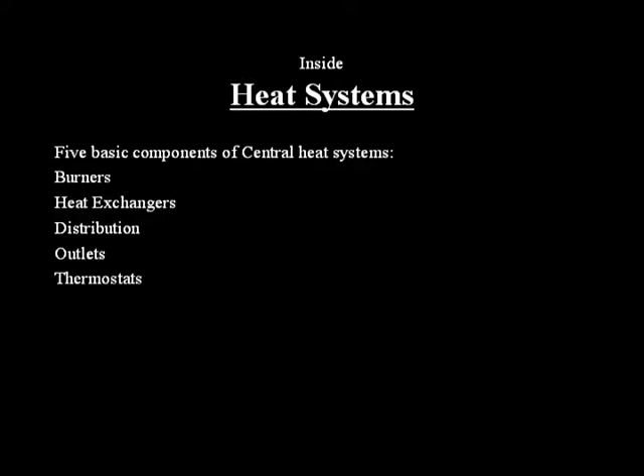There are 5 basic components of central heat systems: burners, heat exchangers, distribution, outlets, and thermostats. A burner converts gas or oil to heat at temperatures reaching 800 degrees, or a resistance coil converts electrical energy to heat. At the heart of the furnace is a heat exchanger that transfers this heat from the flame to air or water. The toxic fumes produced here rise up and exit through the flue.

One of the worst problems your heater can have is a cracked heat exchanger. When this occurs, toxic fumes that should be headed upward instead begin to seep into ducts and circulate through the house. If you ever smell fumes, shut off the heater and leave your house immediately. This is a rare event and usually happens in furnaces older than 20 years of age. Yet it's a good idea to have your furnace serviced once a year. The professionals will check out your heat exchanger for signs of trouble.

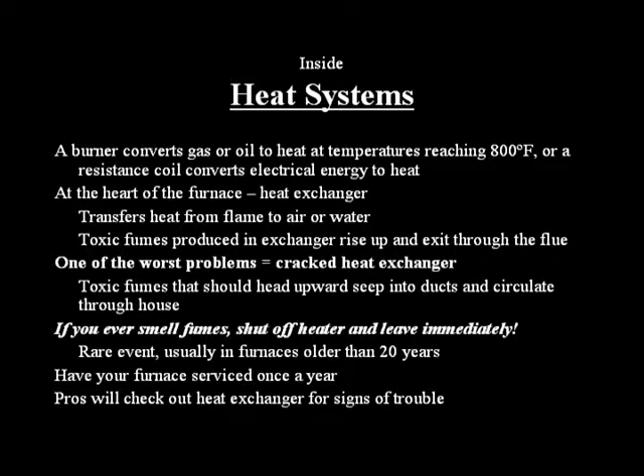There must also be a distribution system, such as pipes or ducts, to circulate air, water, or steam around the house. Heat is then transferred to the rooms by vents or radiators. Larger houses are more difficult to heat because the registers or radiators farthest from the furnace or boiler don't receive as much heat as closer outlets. To minimize this problem, warm air systems have dampers, hot water systems have throttling valves, and steam systems have air valves.

The most effective location of a register or radiator is along an exterior wall near windows or doors. Here, heated air will mix with cold air that infiltrates the house through window or door joints. To get more heat into the farther rooms, reduce the flow of heat in registers closest to the furnace. Look for return grilles on opposite walls of supply registers, or if there is a central return grille for the entire floor, it should be on the wall farthest from the door that leads to the floor.

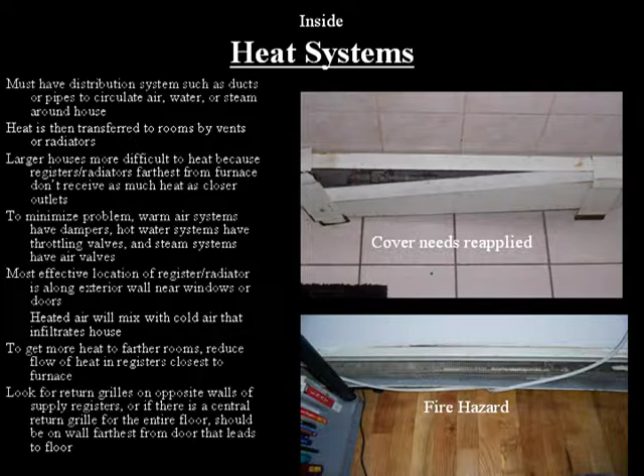And last, there must also be a thermostat with a master shutoff switch somewhere near the furnace. When the temperature drops below the thermostat setting, electrical contact points close and activate the system. When the set temperature is reached, the electrical contacts open and shut down the system.

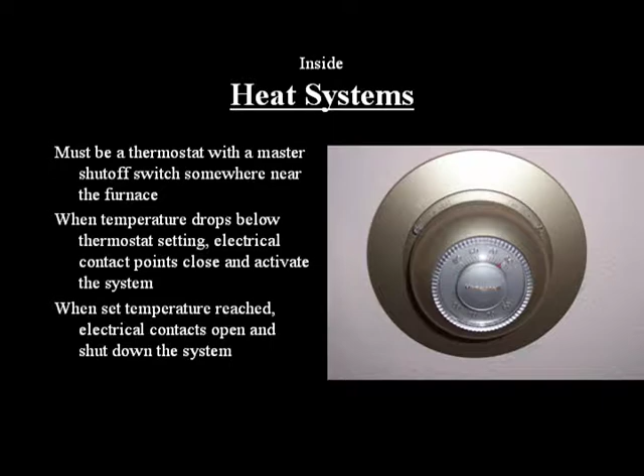Ideally, you want your home's humidity to be between 30 and 40% during the winter. Power spray humidifiers, as shown in the picture, are a great solution if you don't already have some humidifiers in rooms. Power spray humidifiers have a humidity sensing device and can be programmed with the touch of a button.

Warm air systems are also popular because of their ability to adapt to central air conditioners, and there are no pipes that can freeze or burst. The biggest advantage of warm air systems is price. Installing a new furnace is only a third of the price of a hot water or steam boiler.

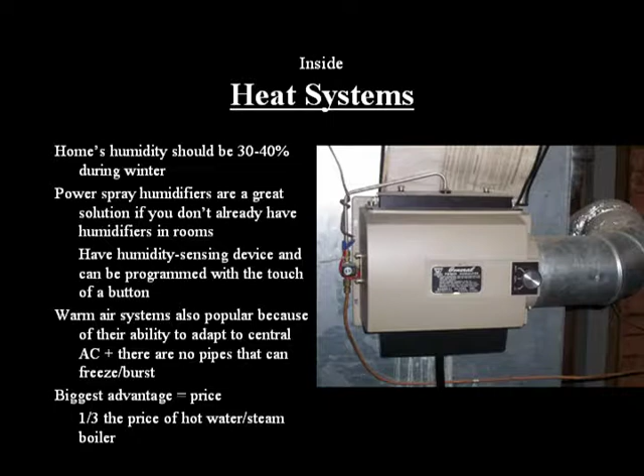Older homes may have gravity warm air systems. The large furnace looks like an octopus with many ducts coming out of it. There are no moving parts or motors, so this system works on the principle that warm air displaces cold air, thus causing air circulation. This system is considered obsolete, but if your house still has this system, it can be updated by installing a fan and motor assembly called a blower unit.

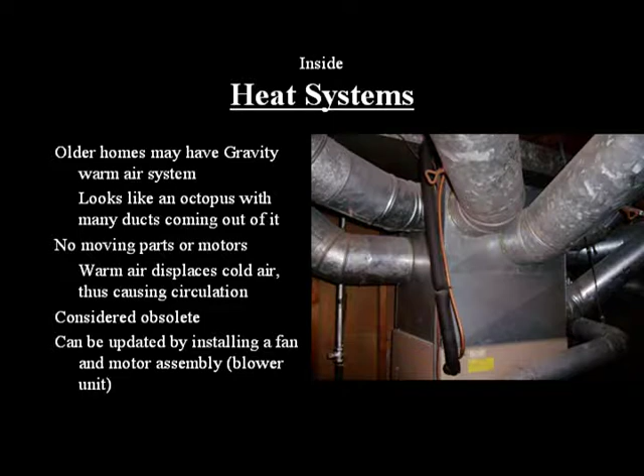A heat pump is a unique device. It can transfer heat from the outside to the inside for heating purposes, but can also do the reverse for cooling purposes. Of course, when the air outside gets very cold, the efficiency declines, which is why there are electric furnace coils incorporated into the system as an emergency backup.

In heat mode, the outdoor unit pulls air across coils. Heat is then extracted from the air and transferred to a refrigerant, which is normally a gas, at atmospheric temperature and pressure. A compressor compresses the refrigerant to extract the heat and sends it to the indoor unit. This fluid travels to the indoor unit and a blower sends air to be heated across more coils.

Outside, the unit should not be in a location where water can freeze to the blades of the grill. In other words, it shouldn't be under a leaky gutter. No bushes should be within 1 foot of the air intake on the side of the unit, and no tree branches should be hanging within 5 feet of the top where debris can settle. The unit should also be mounted on a concrete slab at least 6 inches off of the ground.

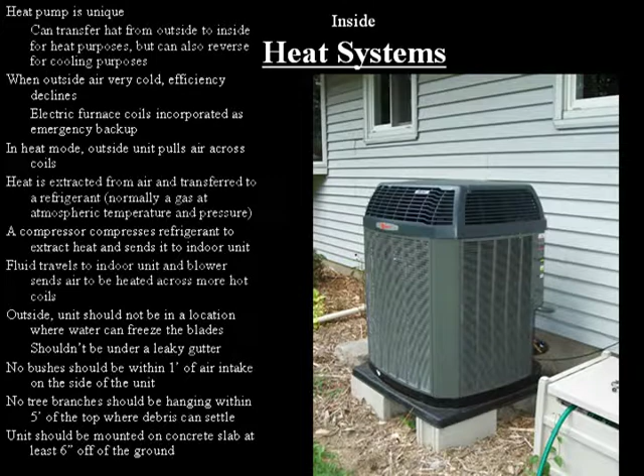Some homes are equipped with condensing furnaces. These were developed in the 1970s during the fuel crisis. Their high efficiency is the result of a second heat exchanger that extracts more heat from the exhaust gases that flow up the chimney from conventional furnaces. The temperature of the exhaust gases eventually reaches a point where the water vapor in the gas condenses and releases heat.

A pulsed combustion furnace is another high-efficiency furnace. Heat is also extracted from exhaust gases like the condensing furnace. However, heat in a condensing furnace results from continuous burning of fuel, whereas a pulsed combustion furnace gets its heat from 60 to 70 tiny explosions per second of a gas and air mixture.

Hot water systems work on the principle that water heated in a boiler can be distributed through pipes to radiators located throughout the house. When water is heated, it expands and increases its overall volume. To compensate for the extra volume, an expansion tank is needed and is often located in the attic. Without this tank, pressure would build up in the system and rupture pipes and fittings.

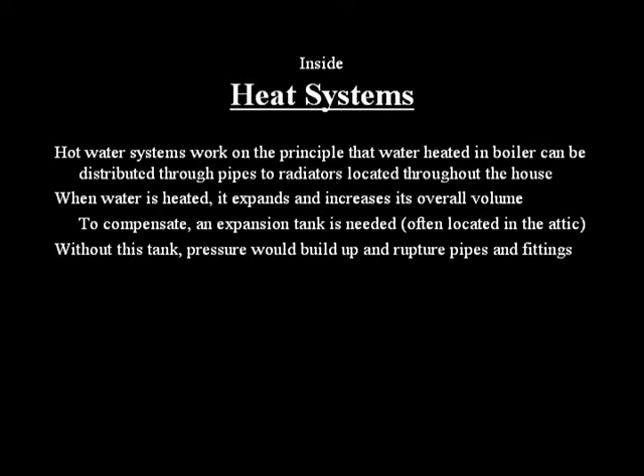The boiler water supply is taken from the house inlet supply. Your home supply of water has a pressure normally between 30 and 60 pounds per square inch. Water that is distributed through the heat system requires a lower pressure, usually 12 to 22 pounds per square inch. Therefore, a pressure-reducing valve is installed somewhere before the water enters the boiler.

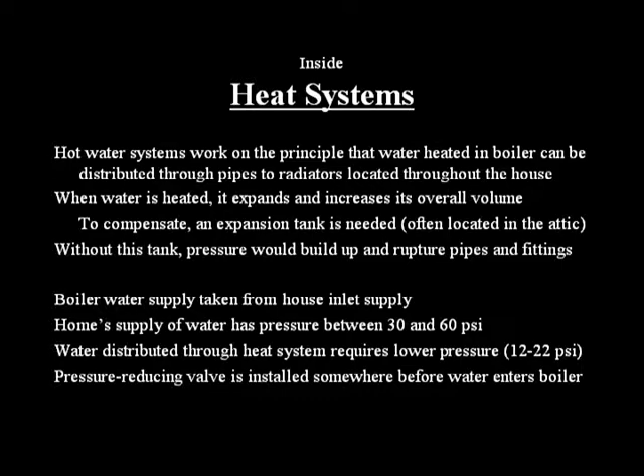Boilers are made of cast iron or steel, cast iron being less resistant to corrosion over time. The lifespan of most boilers is anywhere between 20 and 30 years. The only time a boiler needs to be replaced is when leaks occur that can't be patched or fixed. Don't forget that condensation may form and mislead you.

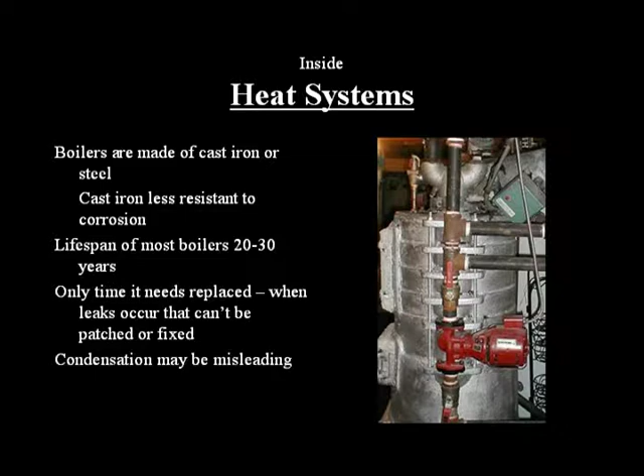Gravity hot water systems, as with warm air, are now considered obsolete and inefficient. The same principles of hot and cold apply. As water is heated, it becomes lighter and displaces cold water back to the boiler for heating. The distribution piping is about 2 more inches in diameter than forced system piping.

Gravity systems are classified as either open or closed. In an open system, the expansion tank has an overflow pipe extending to the atmosphere. Closed systems are not open to the atmosphere and have the ability to operate at higher temperatures. If you own a house with a gravity hot water system, or are interested in buying a house with this outdated system, the good news is it can be converted to a forced hot water system by installing a centrifugal pump and new controls.

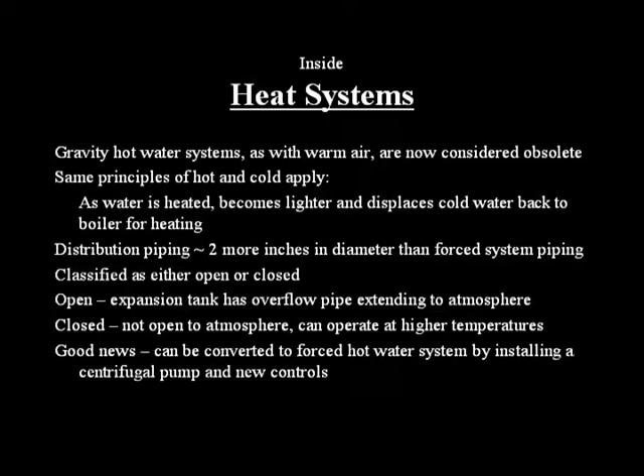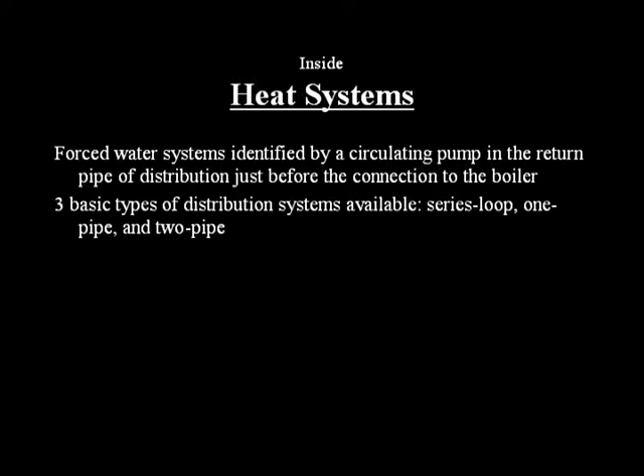Forced water systems are identified by a circulating pump in the return pipe of distribution just before the connection to the boiler. There are 3 basic types of distribution systems available: series loop, 1-pipe, and 2-pipe. Series loop is the simplest and easiest to install. This is usually found in smaller homes where individual room adjustments are not needed to balance heat distribution. Baseboard convectors are present, and when the system is shut off, all water flow stops. Larger houses may be divided into 2 or more zones.

A 1-pipe system is exactly that. 1 pipe serves as the supply and return. Radiators are attached to the supply pipe by 2 risers, 1 on each end. The radiators also have a shutoff valve located on the inlet riser, so room-by-room control is possible. 2-pipe systems have 1 supply pipe, 1 return pipe. Cool water leaving the radiator doesn't mix with the hot water from the supply main.

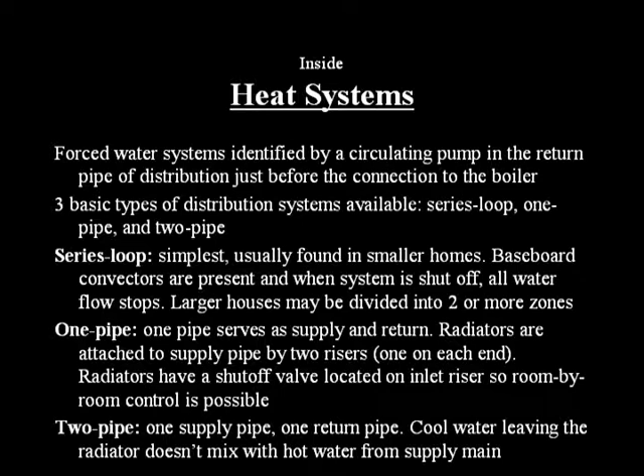Condensing boilers, as with condensing furnaces, increase the efficiency of the system by extracting more heat from exhaust gases with the heat exchanger and transferring the heat to water. Again, the water vapor in the gas condenses, giving up heat.

Neither condensing furnaces nor boilers require chimneys for venting exhaust gases. Instead, a plastic pipe can be used to vent the gases through a sidewall. Both versions of this system require an intake air duct if outside air is being used for combustion. Both will have a power vent called an induced draft blower and condensation drain lines.

Pulse boilers are also available to increase efficiency. Again, heat is generated as a result of 60 to 70 tiny gas explosions per second. The big drawback of the system is the noise it generates.

Steam systems are very similar to hot water systems. They are no longer installed in homes but still exist in older homes. There is an easy way to tell if your system is hot water or steam. A water level gauge will be present on the boiler of a steam system. The water level in the gauge should be halfway to 2/3 full.

Too much water will lead to leaks, and not enough water means water needs to be introduced into the system by manually opening the fill valve in the water supply line. Rather than pipes completely filled with water, only about 3/4 of the pipes are filled with water and the rest of the space is air.

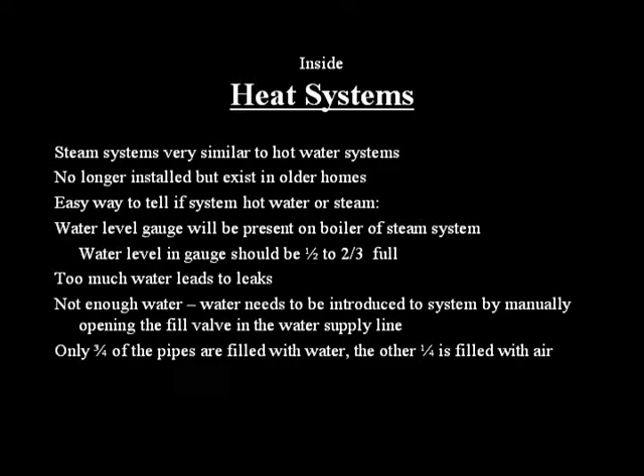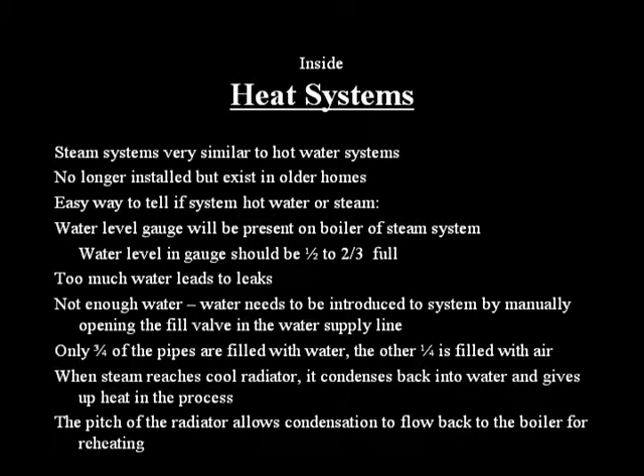When the steam reaches the cool radiator, it condenses back into water and in the process gives up heat. The pitch of the radiator allows condensation to flow back to the boiler for reheating. The distribution piping for steam systems will be 1-pipe or 2-pipe configurations. The easiest way to tell which configuration you have is to look at the number of pipes connected to the radiator. In a 1-pipe system, each radiator has a supply valve and an air vent.

2-pipe systems do not have individual air valves on radiators, but instead have a steam trap on the condensate return pipe that allows air that is bound in radiators to escape through the main vent. The steam trap will close on steam contact, therefore keeping the steam within the system. An advantage of a 2-pipe configuration is that it can be converted into a forced hot water system.

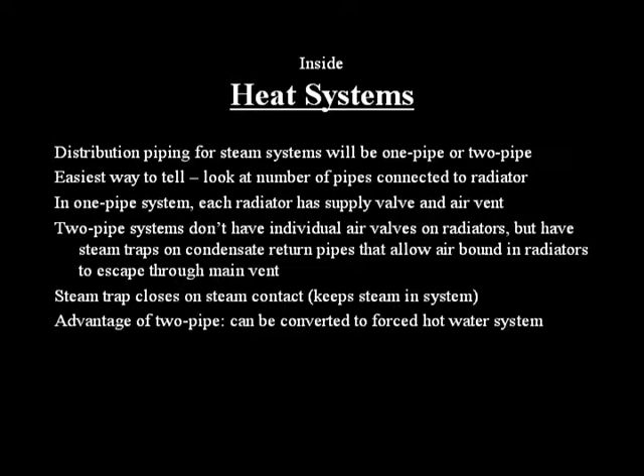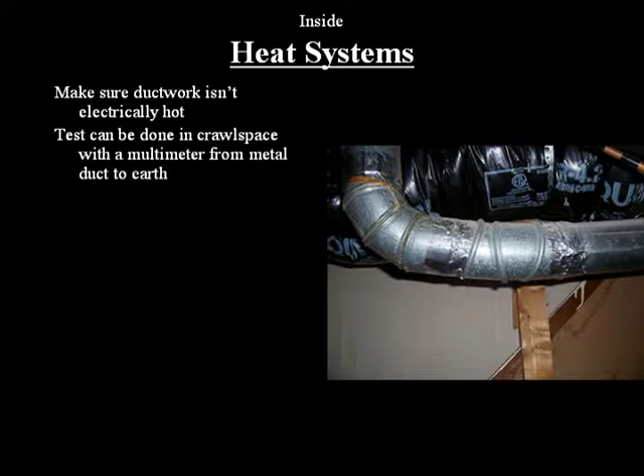Now let's look at your ductwork. First and foremost, you want to make sure your ductwork is not electrically hot. This test can be done in your crawl space with a multimeter from the metal duct to the earth. You should get a reading of 0 volts. However, a few volts indicate a stray current and your ductwork needs grounded. Any reading over 50 volts means you are dealing with a hot duct, so don't touch.

The rest of your observations should take place in each room with a vent opening. Make sure there is adequate airflow. And leaks in duct joints can usually be fixed with duct tape.

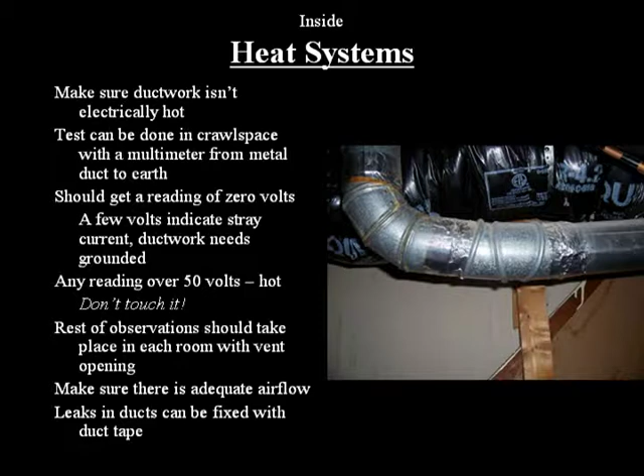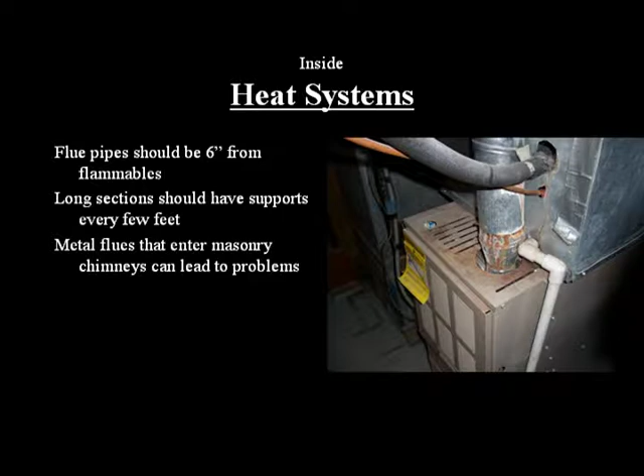Flue pipe should be at least 6 inches from flammables. Long sections should have some type of support every few feet. Metal flues that enter masonry chimneys can lead to problems. It's very hard to look inside of the chimney for debris and broken bricks, but if your flue pipe is corroded where it meets the masonry, chances are this needs repaired.

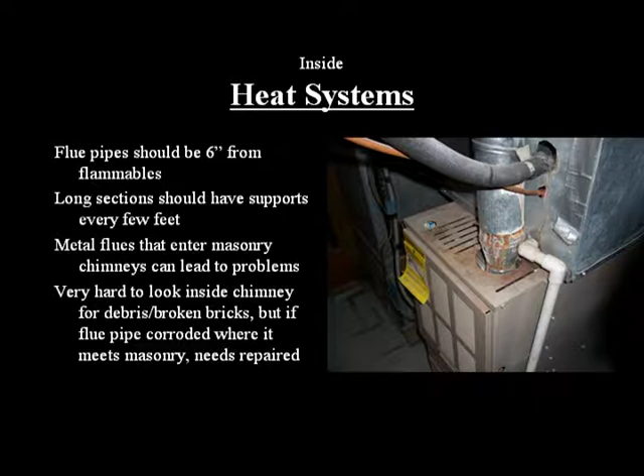Backdrafting occurs when gases that normally rise through a flue to exit a house reverse and flow back into the building. This commonly happens when the flue is cold and needs to be warmed up. However, this can also occur if the outside air pressure is higher than the pressure inside of the house. A good test to perform is to hold a mirror up to a potential backdraft area. Since moisture is carried in heated air, any backdraft will fog up the mirror.

Almost everywhere, a wood-burning stove should have a 3-foot clearance from any combustible wall. Sometimes the wall is covered with brick or sheet metal to compensate, as it should. The legs of the stove should be at least 6 inches off of a non-flammable floor or floor covering. The flue pipe from the stove to the chimney should be as short as possible, with the crimped end of the flue pipe inserted into the stove collar. This prevents creosote from dripping on the floor.

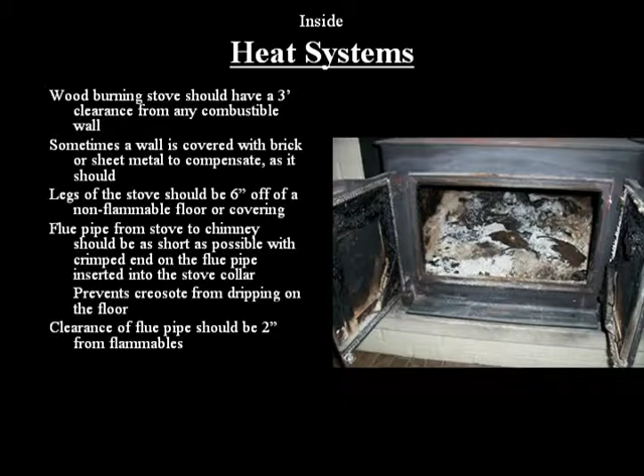The clearance of the flue pipe should be at least 2 inches from flammables. Every stove should have a working damper to control combustion. In a worst-case scenario, if a flue fire began, you could cut the air off by turning the damper sideways.

There are 2 basic types of fireplaces on the market: masonry and metal insert. Check for any major cracks in masonry that surrounds the firebox. It is very hard to identify whether the chimney lining is intact from the inside. However, on the exterior inspection of your house, if you see any creosote stain emerging from mortar joints, it is a good indication that the chimney lining is bad.

You can identify a previous chimney fire by puffy, colored creosote, a distorted rain cap, or smoke stains around mortar joint cracks. In addition to liners, there should also be a wash cap to prevent rain from entering the chimney. Sometimes there is a grill network called a spark arrestor that prevents large sparks from leaving the chimney and setting fire to wood around the house.